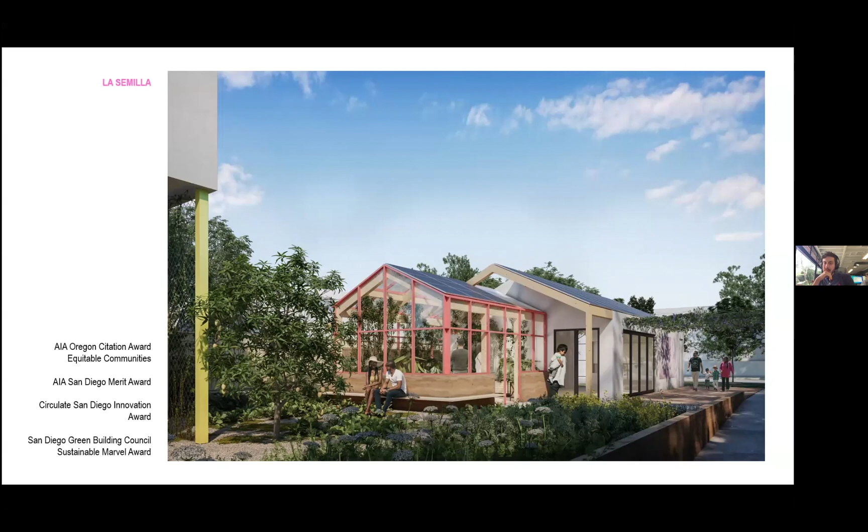I think what was great about this, and why we both pursued this project together, is we were introduced through a mutual mentor and started having these larger conversations around both of these ideas, and it sort of manifested into this project serendipitously. So that's why we're here today.

Wrong thing. Let me flip here. Okay.

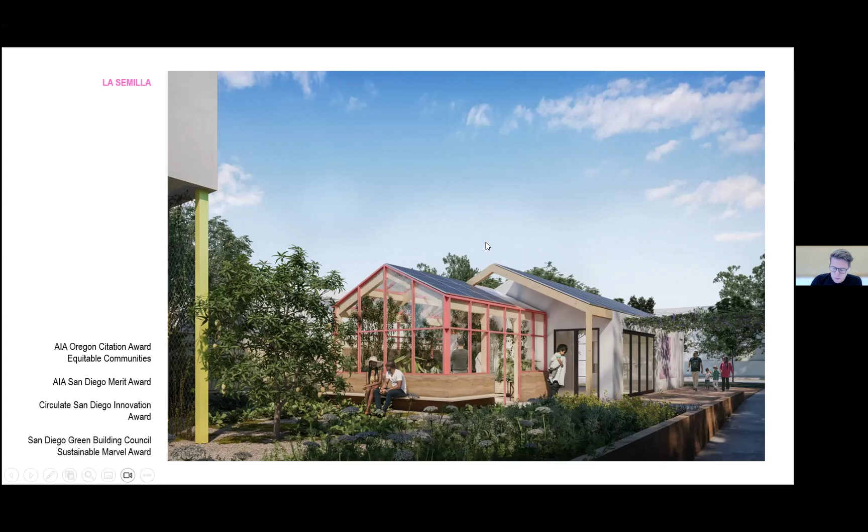So our first journal entry, or where we want to start with this project, is why La Semilla, and why is it happening now? To understand why this particular project is happening now in the community of San Ysidro, we thought it was appropriate to layer together recent, even micro to macro events that are reshaping communities: social justice movements, income disparity, immigration, both legal and illegal, catastrophic climate events. These are all occurring at the same time, while there's also this increased awareness or demand for climate resilient strategies in the built environment.

And it's now being supported by advancing technologies like mass timber and prefabrication, becoming more accessible to a broader range of communities and builders.

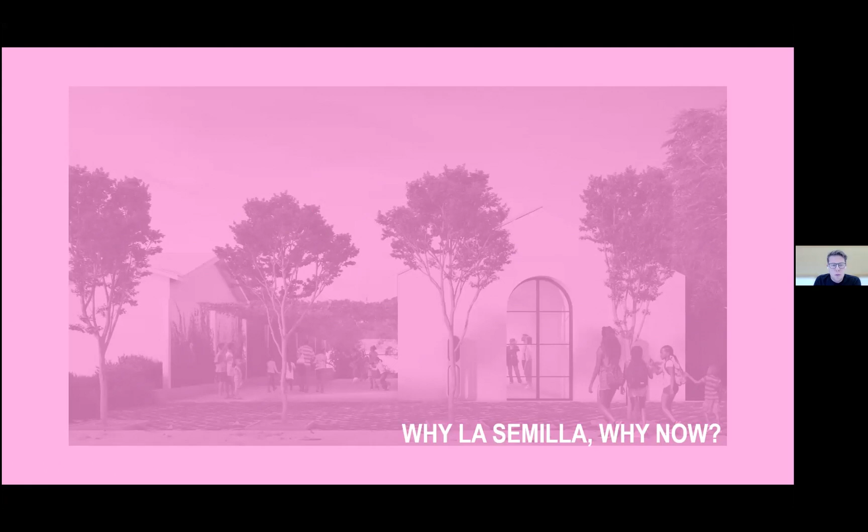Just to add to that - the idea being that La Semilla is a product of large forces and not so much a design exercise as it is a manifestation of where everything's moving at the same time.

To understand San Ysidro as a community, it helps to look at San Diego. San Ysidro is part of the city of San Diego, but it's not its own incorporated city, and it's physically disconnected from the rest of San Diego. The highlighted areas on this map are the boundaries of the city of San Diego. I think there are apparent reasons for this, in no small part because it's the community that abuts the U.S.-Mexico border, so there are questions around control of the border, revenue, access, etc.

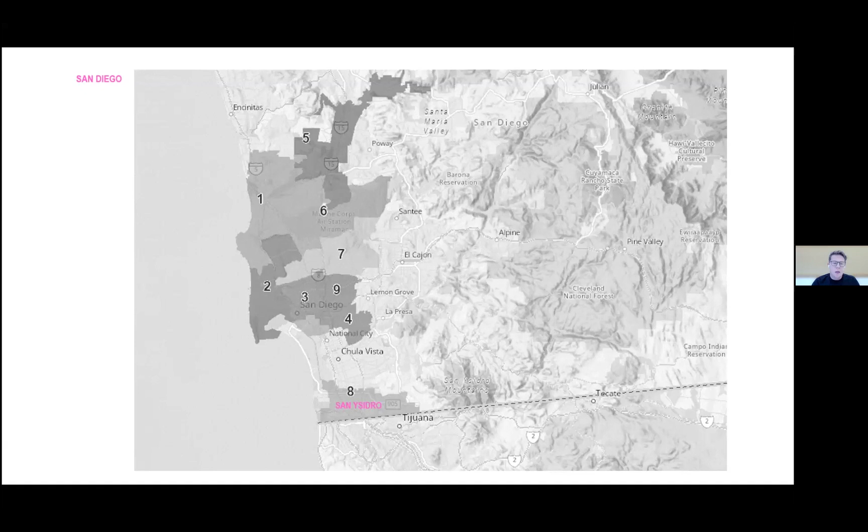If we zoom in even more, we look at this area that is also next to the busiest border crossing in North America, and I believe the fourth busiest crossing in the world. About 60,000 vehicles are crossing the border in both directions each day.

What that has led to is a community facing real issues about air pollution and air quality, while also being largely underserved by the greater whole of San Diego. If you look at that previous map, we would like to say that tax money flows north on that map, and not south. San Ysidro is reliant on the larger city for services, infrastructure and revenue that's not always proportional, while it's also absorbing these forces from the border, both good and bad - things like mass migration north, and air pollution.

But it's a very self-reliant community, very engaged, made up of multi-generational, largely Hispanic families. The population generally is pretty young - median age of 31, almost half the population is foreign born, with Mexico being the primary country of origin, which gave us a lot of rich information about this project.

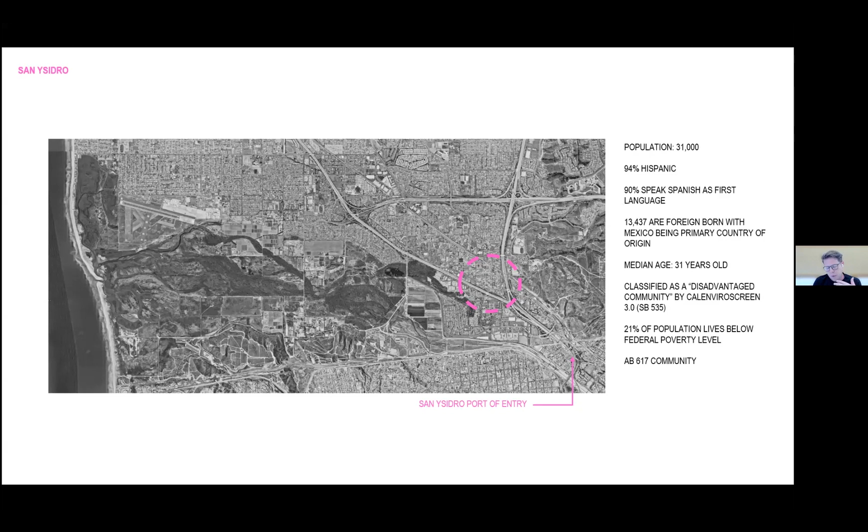And so this is where our client Casa Familiar sort of comes in.

Casa Familiar is a woman-led, largely Latinx social innovation nonprofit, and they cultivate and nurture this community through providing support services, education, immigration access, documentation, food assistance, job placement, and they've taken on this environmental justice movement as a reaction to the quality of air in the neighborhood.

They've taken it upon themselves to really do a lot. Environmental justice was a big initiative - things like guerrilla-style fundraising and initiatives that don't require big bureaucratic approvals, such as urban greening, planting fruit trees throughout the neighborhood, educating the neighborhood on renewable resources, and trying to reinforce public transportation. They've also engaged with San Diego State University and the University of Washington to do air pollution monitoring in this area, and have shown that it's far worse than what is tracked at the state level.

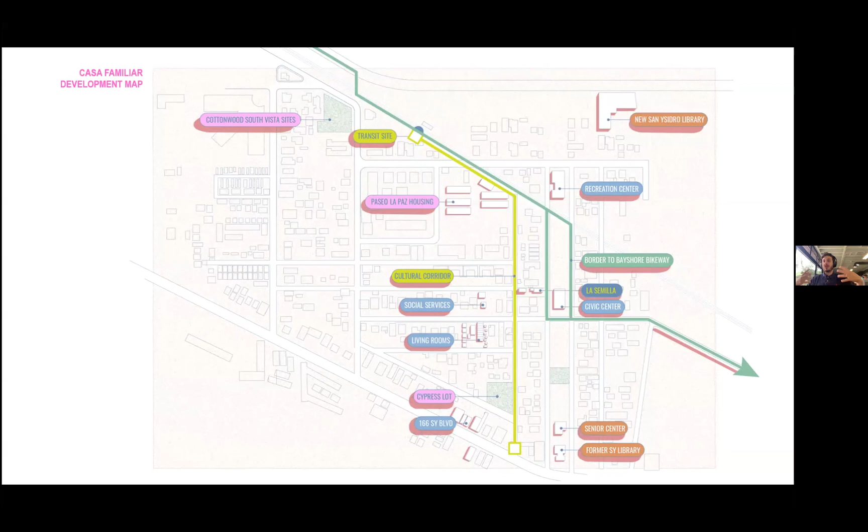So the program ended up changing. Yeah.

So I just wanted to give an overview of what's happening within this portion of the larger community of San Ysidro, and these are all initiatives mostly headed up by Casa Familiar. It starts with this idea of a cultural corridor, represented here with this yellow line. It's repurposing an alley basically for a pedestrian walk that the neighbors can activate at the edges themselves, whether they densify it with ADUs, murals, or having events along it. It's in partnership with the city, sort of taking back this alley.

And what that creates is this spine or connection between these two lots I mentioned before that are community land trusts for about 100 units. It connects the rest of their projects too. So the projects in blue are CASA owned and run properties.

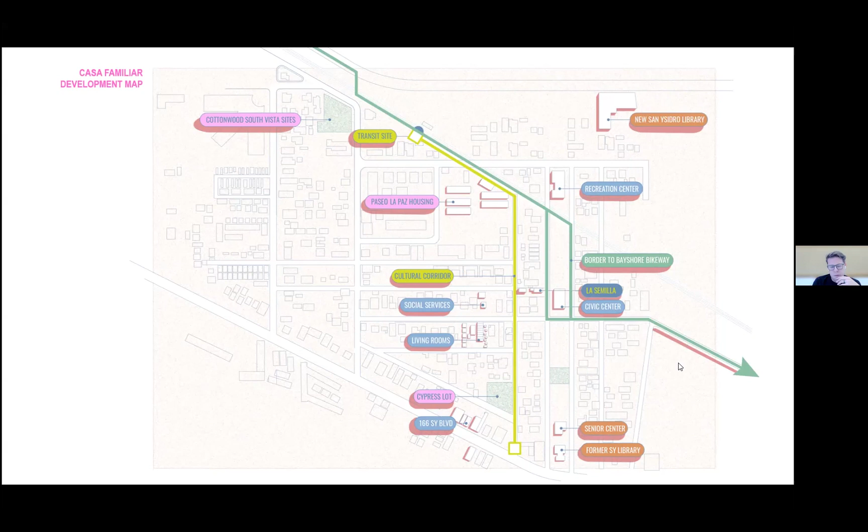What's nice, or what's being layered into this also, is a continuation of the Bayshore Bikeway, for those in San Diego, being continued down to the border. The transit site noted here is a trolley that goes to the border, back north up to north of downtown. Our project happens sort of in the middle of all of this, and it's the first project to go in. So it's acting as the connector of what happens in the future.

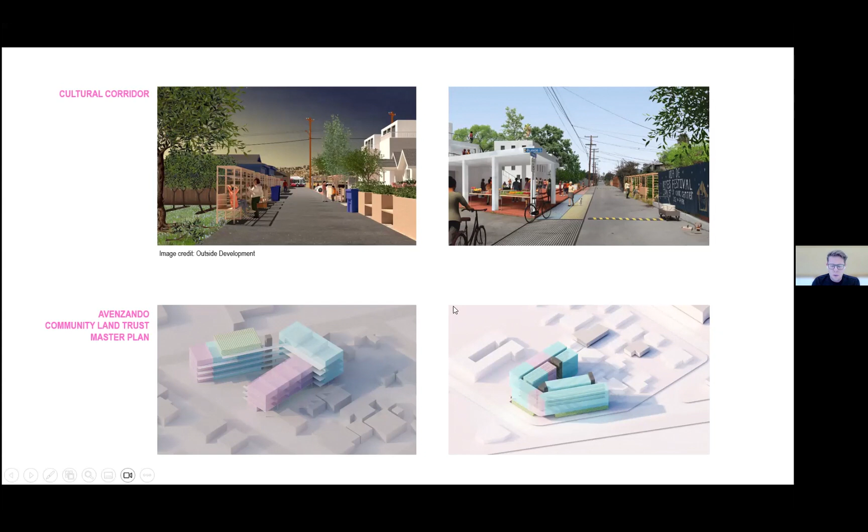So some quick images about what the cultural corridor can be. These were done previous to us engaging with them, but some ideas about the cultural corridor, and then some master planning that we did with Casa Familiar around those two sites and the community land trust.

So I think this is where the story of La Semilla begins for us. We were given a high level brief from Lisa about what this project should be, but there was no program, as has been mentioned, and there was no budget. It really was sort of this dream commission that everyone talks about. What we needed to do was conceptualize this project, get a cost estimate for it, and whatever that number ended up being, CASA was going to get those funds by getting it into the state, getting it to the governor's office to get included in the state budget for that year.

I think this was 2022, and we only had a couple months to do this. We started with three community meetings, asking very basic questions like: what do you need? What are the opportunities around this site? What are the limitations?

And the things that we heard gave us a great understanding that this isn't a flashy big project in the middle of town. It's a very humble, responsive project.

And then we tried to define what La Semilla is even going to be. We came up with all these ideas: a community center, a social hub, a demonstration project, a connector. I don't know that we've all settled on this, but I settled on just calling it a climate resiliency community hub. It doesn't have a defined name in project typologies.

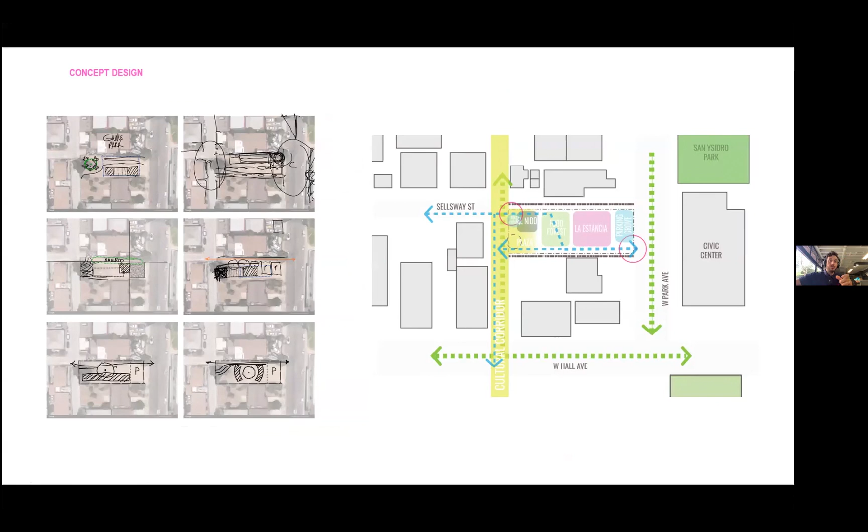It's funny how open people think when they're not concerned about zoning and stuff like that. People were asking for things like a little grocery store or a drugstore, because those are things missing in their community. From an urban design standpoint, that was exciting to see—this nascent demand for more mixed-use land use in a neighborhood that's not really zoned for that. People really crave that access, so we wanted to stretch the program as much as we could to reach toward their needs, but within the constraints we had from a regulatory standpoint.

This is a residentially zoned property, so we're not doing any conditional use permit. Everything is by right, but that did put constraints on what we call something, or what it could be.

And then going back to precedent for what these spaces could be—textures and materials, both building and site—there was a large conversation around connecting this back to the community's places of origin. As I mentioned, a lot of them come from Mexico, and we're not overtly recreating a building from Central America, but we're finding it in textures, colors, and scale.

Can we go back one? I think the key elements we were looking at were, in terms of scale, we wanted to provide something that felt domestic and fit into the building types in the neighborhood. So we knew we were going to have some sort of building volume for the main program, and then we knew we wanted some sort of little tower—like a little wizard tower kind of thing—a beacon for the neighborhood.

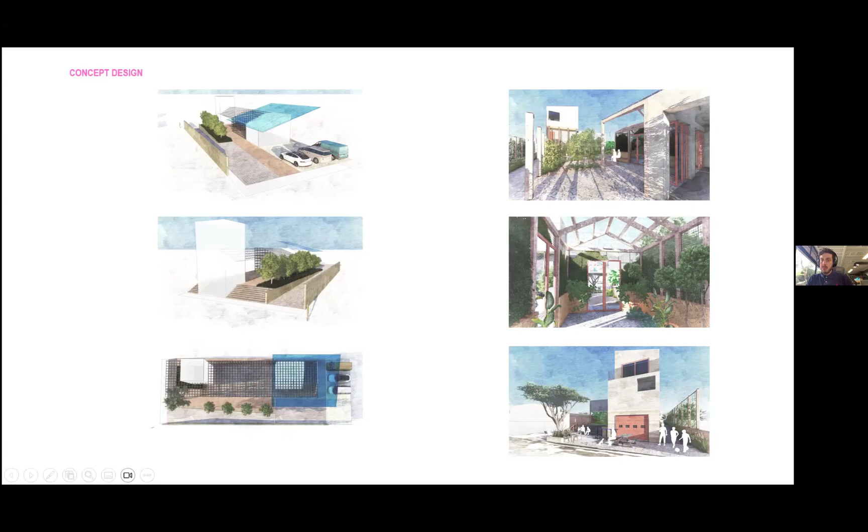Still in my slides for later, Ben. Oh, I'm sorry, no you're fine. I'm just joking, thanks for letting me know. No, you're fine, sorry, let me go back.

Okay, so we settled on this, which was essentially what went out as the concept package—all those elements that we just listed in the program, and what Ben mentioned. A lot of ideas packed into this.

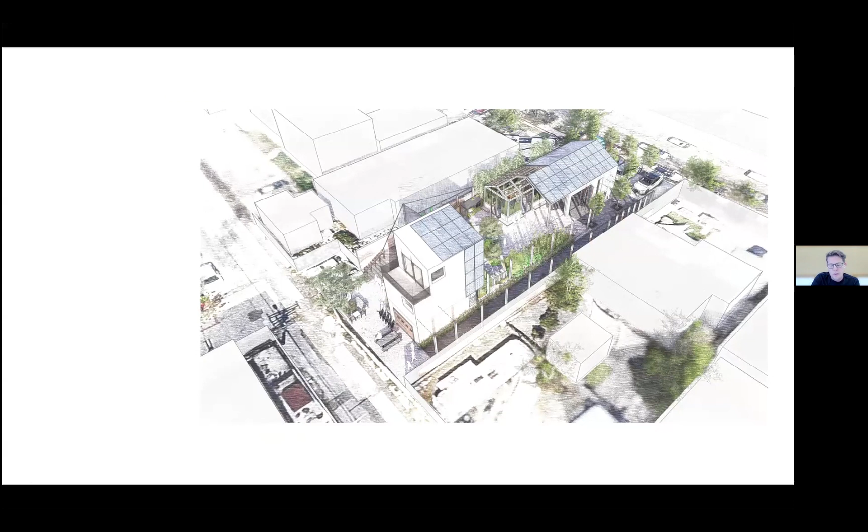We sent it off to the governor's office, and we had support from state senators, and it did not make it in the budget. So that leads us to the next entry in this project: was this the end or the beginning of La Semilla? Spoiler alert, it was not the end. It was the beginning.

Lisa pressed ahead, and they secured private donations that funded pre-development costs, and they assembled a team to start applying for grants, specifically a grant from the Strategic Growth Council for climate resiliency centers in the state of California.

These are just—this was our abbreviated version of the concept package, just to share a few stats: a 7,000 square foot lot, with different proportions of square footage—2,000 of building, another 1,000 square feet of cultural plaza connected to the corridor, and a 1,700 square foot food forest. So 81% of the site was outdoor space, with charging stations, solar photovoltaic, construction costs, and pre-development costs.

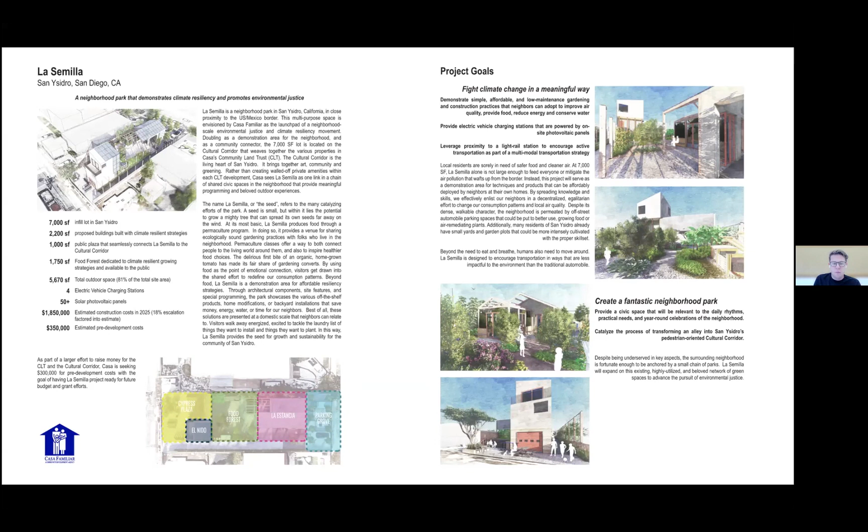This was sort of our launching point into this next phase, when Lisa called and said, we have this donation money, we have pre-development money, let's move ahead. So that leads us into the next version, the next iteration of design, I suppose.

So the idea for La Semilla is to kind of have a similar effect that a climate resiliency park or a climate mitigation park would have, in terms of fixing air quality and providing a didactic space for people to learn about natural systems and ecosystem services and stuff like that. However, because of the lack of scale, in order to do that...

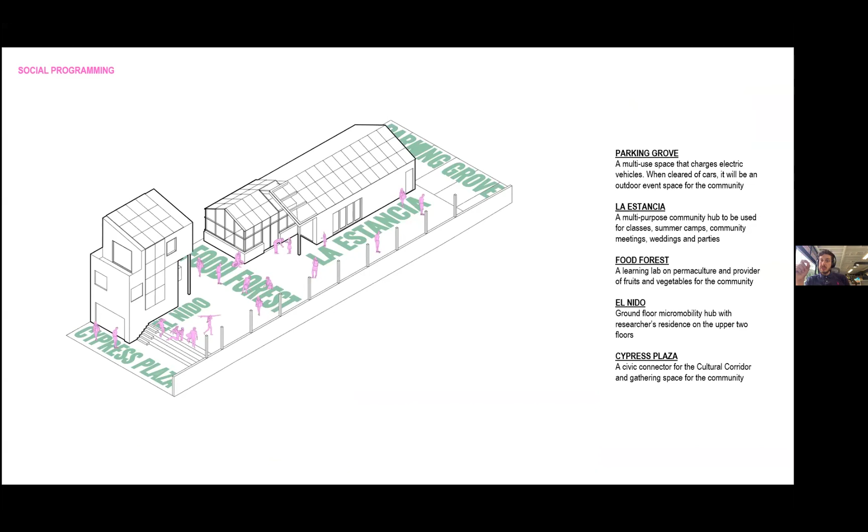The metaphor we came up with was just like dinner with my dad one night, and this idea that this is a seed. So the seed doesn't feed you, but the seed has the power to scale up and feed many people and produce more seeds that then get spread.

So this idea that we're going to be showcasing stuff on this site and bringing people into it in such a natural—I mean casual—way. Like they're going to come here for a quinceañera, I'll work through that later, or they're going to come here for some sort of social reason, and then they're going to get exposed to new ideas that will then get implemented in other places where people can control space.

So the anatomy of this, starting from the left-hand side of the screen: we've got this thing called Cypress Plaza, an open space that comes off of the alley. Later on I'll point it out again. What it does is it's where the cultural corridor, which is one alley, and another alley intersect. So we pulled back a little bit there and created some space so you can have something like a civic aspect to this.

In that sense, I mean something with a bit harder materials, something rugged, like an urban plaza for use, for lots of people to get together. Beverages can be spilled, people can dance, and it's no problem.

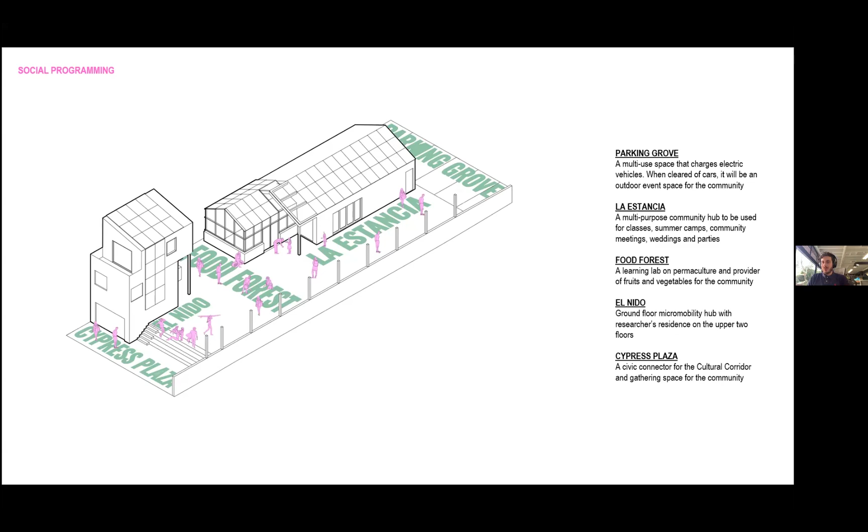And then at the very front, there's a parking grove, got a few fruit trees, some car chargers. That is evolving right now into a bit of a plaza space, more of a pocket garden in the back with a plaza on the side. But we can explain that more later.

So I was just going to tell you a few quick vignettes about what could happen here using these renderings. One thing that could happen at La Semilla is on a summer evening, you have a concert out in the food forest or on the Cypress Plaza, and people walk from across the street from the rec center and from the chain of parks that are the spine of this neighborhood. They can funnel from this chain of parks into this space and come here for an art gallery or music in the park.

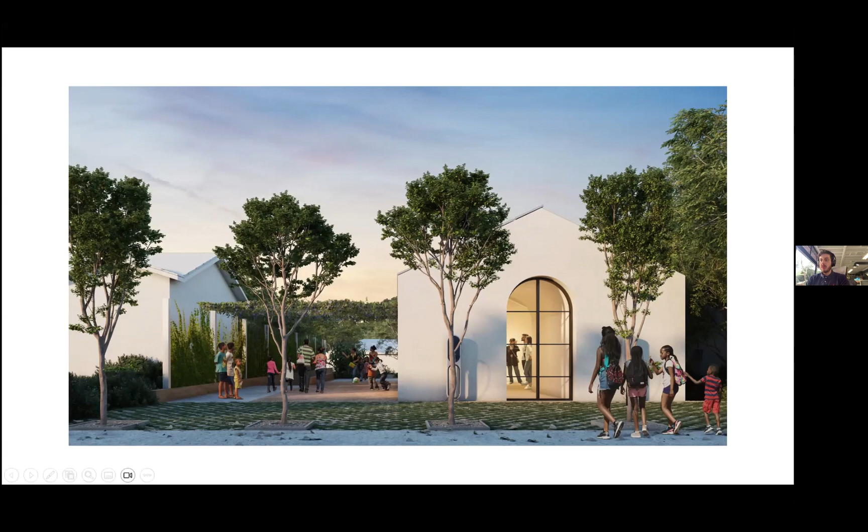The next thing this could serve as is an after school kind of place, especially for high schoolers and middle schoolers. Because it's on axis with another alley I was mentioning before, this actually forms a shortcut. So you can get out of school and cut through this space to get to the rec center, to get to the park. But also, as you're walking by, you might see a friend of yours taking a permaculture class in the food forest.

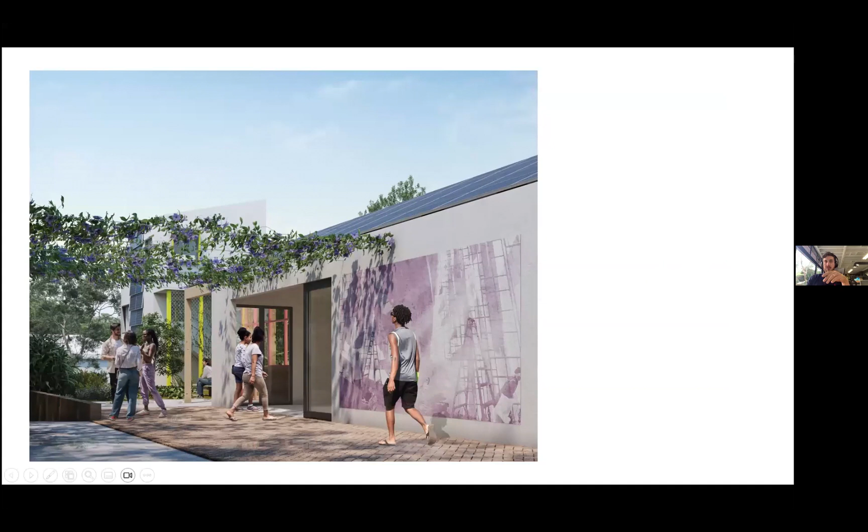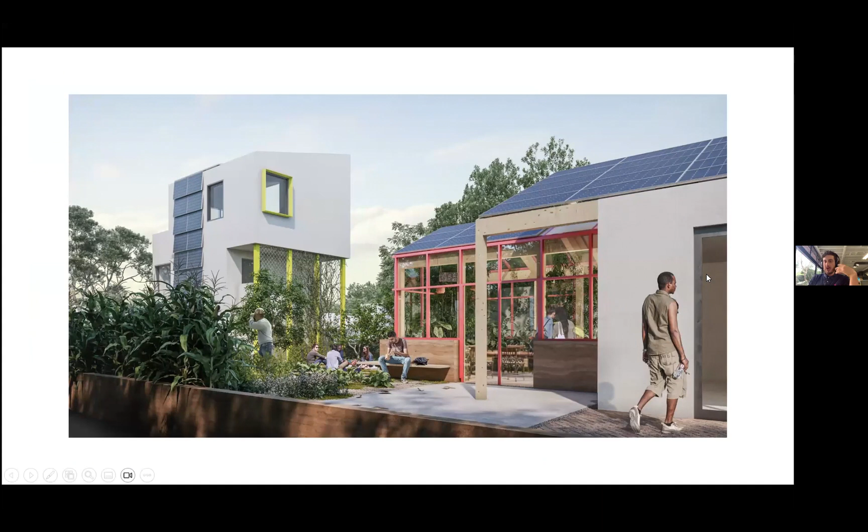You can imagine this greenhouse that's not just an entertaining space, but it's also a functioning greenhouse, a place where you've got starts and seedlings, warming mats, and people mixing coconut coir and preparing soil for being double dug into the ground.

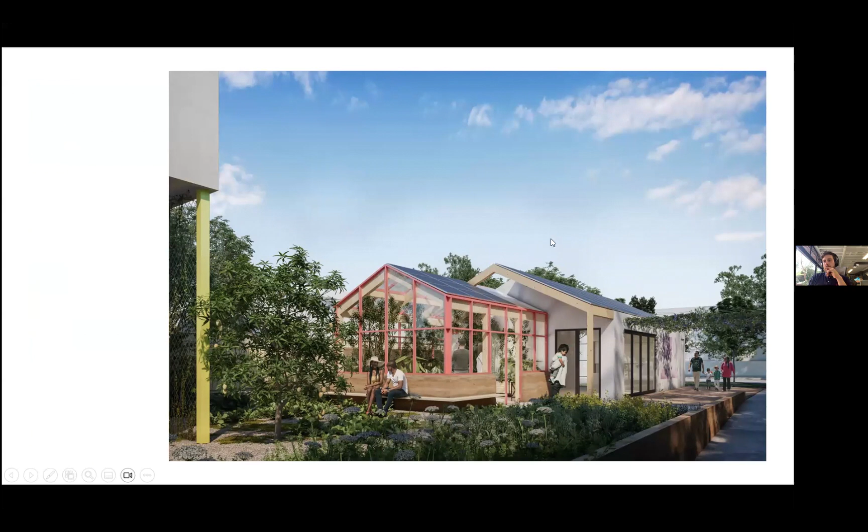And then with the overall space, you can imagine you can have a vendor fair on a weekend with locals selling goods, people assembling to play music and play games. So it just becomes a social scene, a place where people can come together for one reason, and then they run into a neighbor who's there for a different reason, and that's where the color of life is.

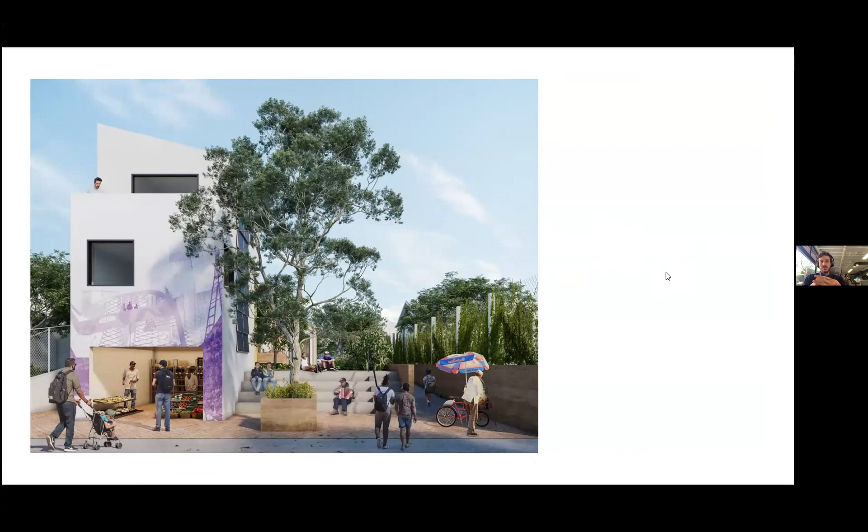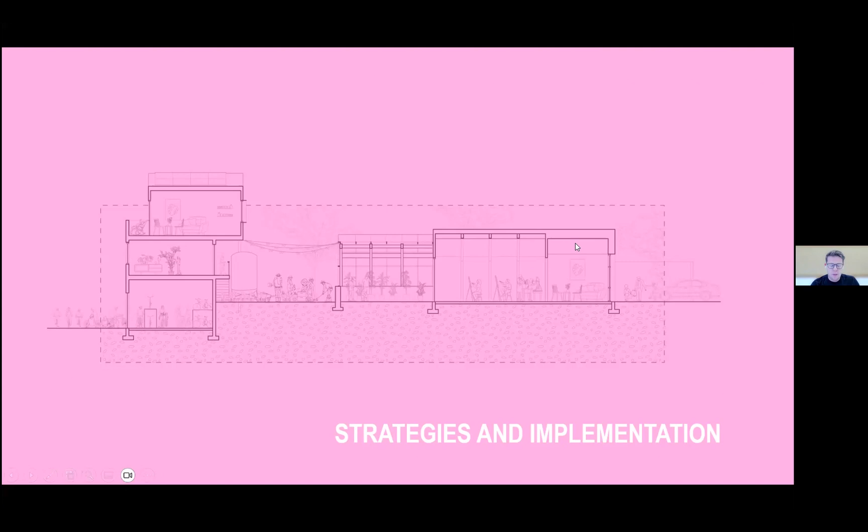So that brings us to our next section that we're calling strategies and implementation. So how did this thing become a reality, or is becoming a reality? It's very much in progress.

We started with environmental strategies. As we developed the program, we also developed environmental strategies. We looked to certification programs. We dabbled in them, but we decided that we don't need to chase a specific certification, but we do need to be held to those standards through this project, while also making sure that all of these strategies were recognizable and digestible to the community.

It doesn't do any good to do this really esoteric system if someone can't point to it and say, oh, I can capture rainwater on my side, or I could do solar PV, which is pretty well known, or I could build a trellis to mitigate sun in my house. So everything was built around these environmental strategies, from the EV charging stations, trellis and shade that serves a purpose, to another opportunity to provide food for the community.

And then down to deciding, because we had to determine the budget and the approach to this, we did decide to do mass timber, and really eliminate as much concrete from the site. This is a challenging thing to do, even though we are in the very southwest corner of the country, surrounded by desert, so access to materials in a responsible way, sourcing those, is very tricky, including mass timber. But we thought it was really important to do that.

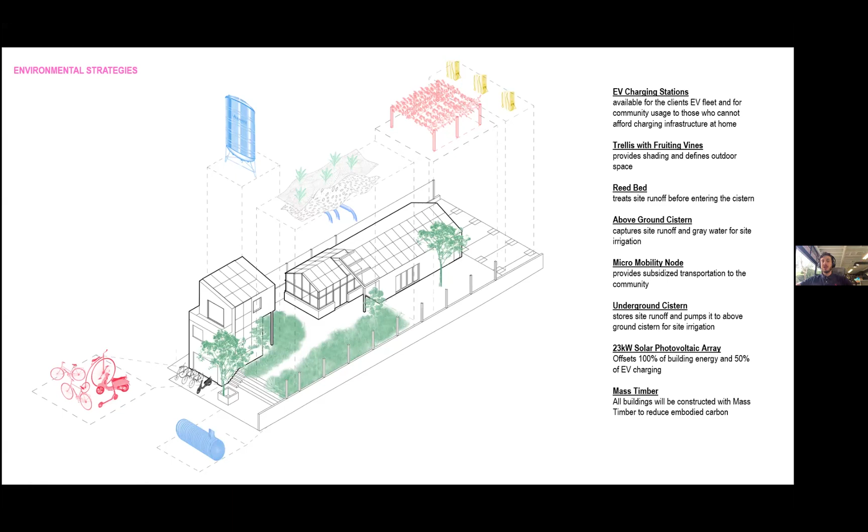So then the water goes through these cisterns and it goes through drip feed, and through the drip feed goes to all the plants. Some of it might get recollected as groundwater recapture. So there's all these different relationships. But we had to create these flow charts just so we could wrap our brains around the different circuitous route that water was taking throughout the site.

For different reasons too, because part of it is if you have water that's coming from gray water, it can't get sprayed to irrigate crops. It has to be delivered via drip and after a filtering process. But if it's rain, it can go to a rain barrel and it's considered clean if it comes off of a roof. So there's all these different ways that it wasn't like any 2 drops were the same. The 2 drops of water were different depending on how they got to us. So it was definitely a puzzle to figure out.

I don't remember how much water use we were offsetting, mainly because it doesn't get much rain on a yearly average. But we did get to make this decision to put these kind of large, kind of expensive infrastructure pieces into the site as a means to at least offset or reinforce this idea of a food forest on the site without completely relying on domestic water to power that.

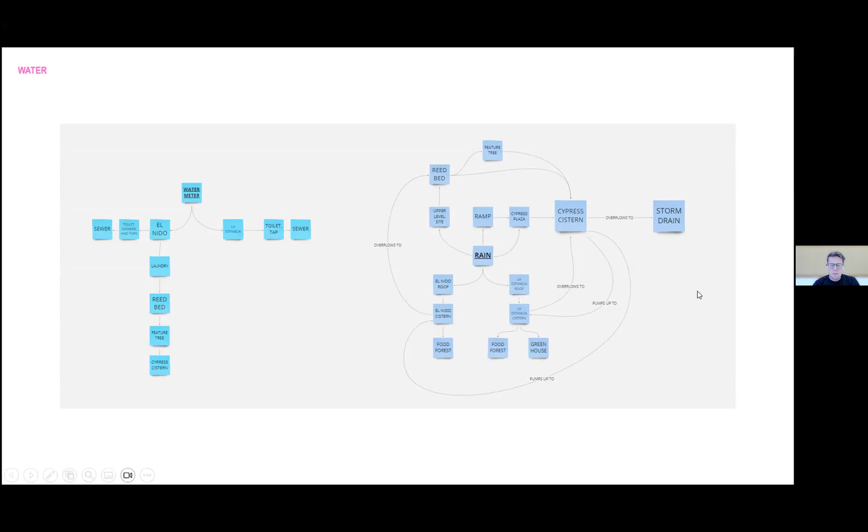I also thought it was interesting that it wasn't a clean cut set of calculations that we did to figure things out. There was a lot of guesstimating. There was a lot of back and forth. This still isn't, to the best of the knowledge of the team, something that you can just crank out a spreadsheet on. Just because our climate is changing, the weather events in San Diego seem to get more severe and more frequent.

But there's also large stretches of the year when we don't get a drop of rain from the sky. So we were all kind of seeing how this whole thing was going to work out. I think that goes into the story of this project—how it gets used and how the programming reinforces or dictates the evolution of this project, which is really exciting to us. It's very much not a finished project when it's built. And the flexibility, how we're going to deal with the uncertainty.

So I think maybe that's a good segue into how this is being implemented. We are almost through permitting on this. We are deep into the realities of these ideas and how, as designers and engineers, these things actually happen on a site.

This project is very much operating on the margins of what the code allows to be applied to this site. We mentioned it's a residential site, we have a mix of uses, and the program has evolved as Casa Familiar has understood what this project could be. Ben mentioned the studio that became a 2-bedroom unit, when there wasn't really any more footprint for that to happen on the site. So we expanded that unit, and the site has evolved into more of an experience.

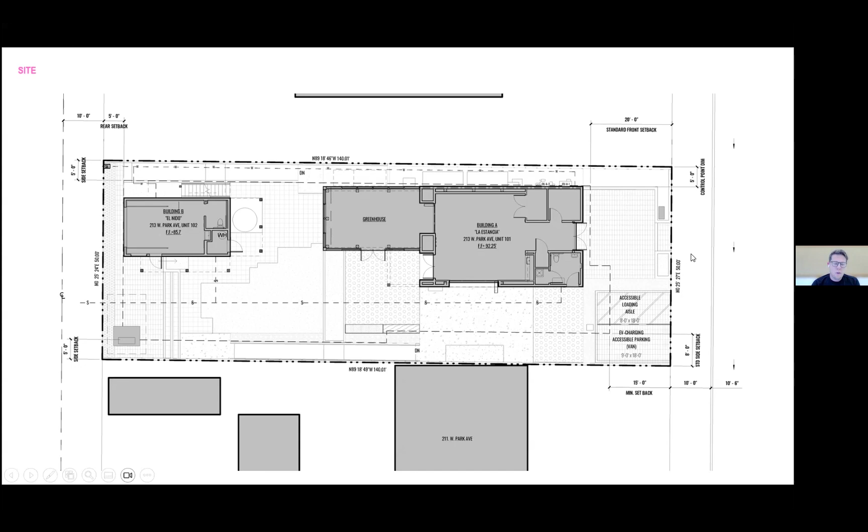And these other big infrastructure pieces like cisterns and how they connect—really getting all that tied in while still maintaining this larger idea, while also dealing with a regulatory agency that has to follow rules, even though they like the project, has been an exciting challenge, but also, as we all know, as architects and people that have maybe built stuff, is still a challenge.

And so the other piece to this that we're really excited about is arts programming. This goes back to a means to connect the site to the community, to people in the community's places of origin or places they remember as kids growing up. But also Casa Familiar has a really robust arts program, a really amazing cross-border arts program that we wanted to celebrate on this site.

And really give this building back—almost the buildings really are just a backdrop for what happens on the site, is the way I like to think about it. They very much come secondary to the activation of the site, and then layering on this arts program. These were ideas that we presented to Casa: tile work, murals, which you saw in some of the renderings, big surfaces where projections could happen if there's a movie or a festival, teaching walls where the caretaker for the food forest could explain to kids how permaculture works in a diagram, or opportunities for sculpture and wayfinding without overtly using signage.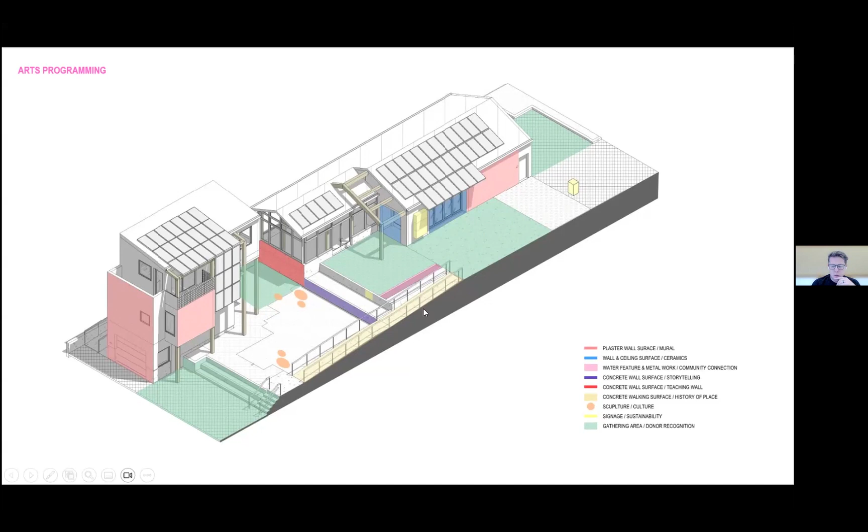Really trying to find these opportunities throughout the site, knowing that this is going to change. In 10 years, these murals may be something totally different, which is really exciting to us, and goes back to that thing we keep saying of what this project is going to be at the end of it.

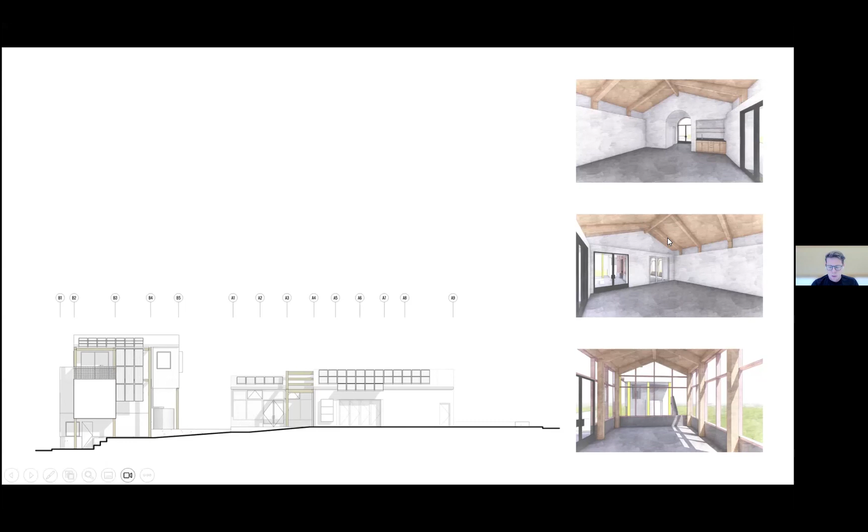We wanted to throw in that most of the renderings are the older version. This is where we are today. This is the expansion, which you saw in the previous AXO, of what El Nido has become—a much more robust building, but it provided some other opportunities around more surfaces, etc. And a couple studies of what the inside looks like for Estancia: the main gathering space, and then the greenhouse.

So, final chapter, and doing pretty good on time here. We thought we'd end with what's next, what's happening now, because this was an unbuilt project.

At a logistical timeline level, the project was awarded an $8.5 million implementation grant from the Strategic Growth Council just about a month ago. That was part of this larger initiative for climate resiliency centers around the country. That money is not the cost to build this project—it also funds programming and operations for a couple years beyond the end of construction, and includes land acquisition and pre-development costs. So this is by no means an $8 million construction project.

We're very mindful of the cost of this thing, even though we are injecting a lot of things that come at a premium. Contractors are interviewing for the project currently, and a groundbreaking has been scheduled for the end of July.

And Wild Willow has been selected—they're another local nonprofit. They will be the facilitator and caretaker for the food forest. And then, as I mentioned earlier, CASA has partnered with a micromobility provider or operator to provide shuttles and hopefully bikes in that ground floor of El Nido that can be used and subsidized, or potentially even free, to the city, to the community of San Ysidro.